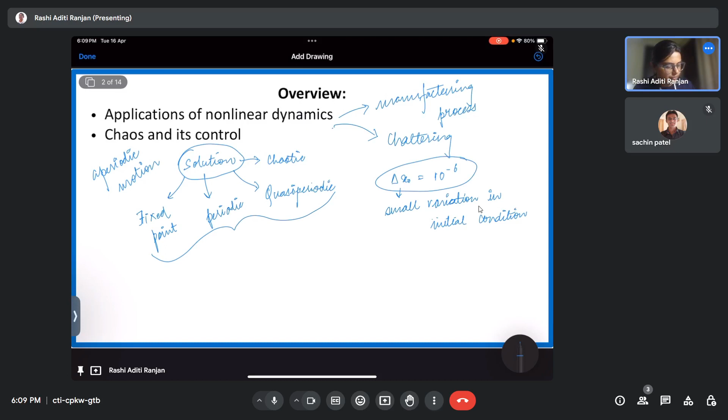Which means that if I am physically using my system, what will I do? I design it on the basis of how it is going to behave. So, suppose I design it for a particular kind of chaotic behavior; let us give it a name, A. My system has some strange attractor A, or A kind of behavior, for the initial condition x naught, x naught dot. This is my solution, which is chaotic.

Okay. Now you see that we as humans, how much variation can we have? Like if I have to give the initial condition myself, it may happen that instead of giving it as 2 mm, I give it as 2 plus 10 to the power minus 6 mm. That is possible, right? This amount of error can anyway be introduced in the system by human error, by machine error, by any kind of error.

Okay, this is possible. But if this much variation is introduced in my system, my chaotic behavior is going to change to some B, which is also chaotic, but it is different from A. It is for the initial condition x naught plus delta x naught. I've kept the velocity the same, just some minor variation in the position. It led to some other chaotic orbit, right?

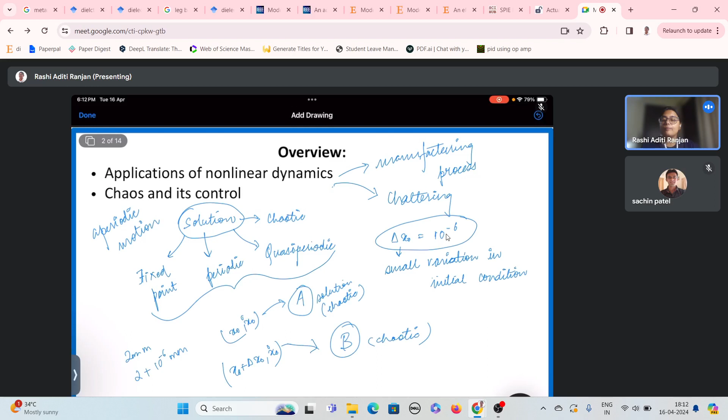Now, see, when we model a system, what do we do? We consider whatever the mechanical relations are, or the chemical reactions, electrical, magnetic, whatever. We form a differential equation that defines my system dynamics. Correct? So when I define my system equation, is it possible that I consider everything? Obviously I can, but it becomes very difficult, right? We usually have some assumptions. Since we have these assumptions, it is not going to give me the proper and realistic behavior of the system, correct? So then what will I do?

The only option I have to deal with a nonlinear system is that I find its equation of motion, I do the analysis, and I get to know how the system is going to behave with what parameter, and then I can just work with the parameter which will give me the required solution. But that is not always possible. Also, there could be some noise or uncertainty in the system, due to environmental conditions or some error. So in that case, what we do is control the chaos. We try to control it.

Now, by controlling, I mean that I know how my system should be. For example, as discussed with you, the pneumatic artificial muscle. If I want my artificial muscle to contract from 4 mm to 2 mm, I know how my system should be. So I'll give it the reference signal, and now the work is of the control system. The control system is going to vary the air pressure in such a way that my desired output is reached. I hope that this is clear. However, I'll discuss chaos and chaos control when I discuss the questions also.

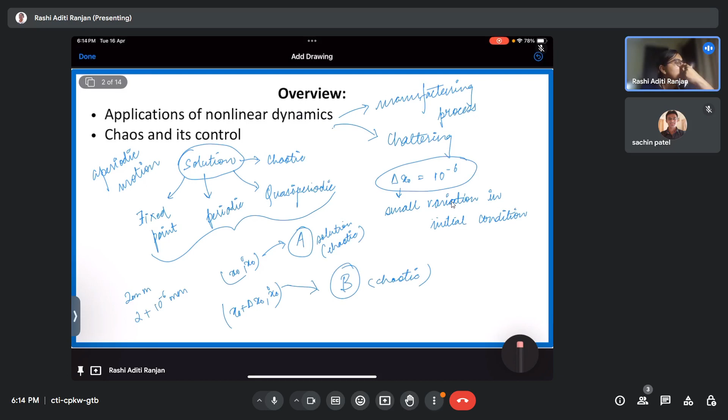Okay, so let us come to the questions. See, this week's assignment is also very easy, and I'll be taking up only some questions which would make your idea clear, and then I expect that you will be able to solve it. Now see, which of the following is related to the chaos control of a system? So firstly, what does chaos control mean?

Now you could ask me why I would write reducing the sensitivity of the system. This basically means it is the objective of your chaos control, reducing the sensitivity of the system. When I say chaos control, it does not always mean that I want to avoid chaos, right? Because avoiding chaos means that I would have to give a lot of work to my system, and only then can it avoid chaos, right?

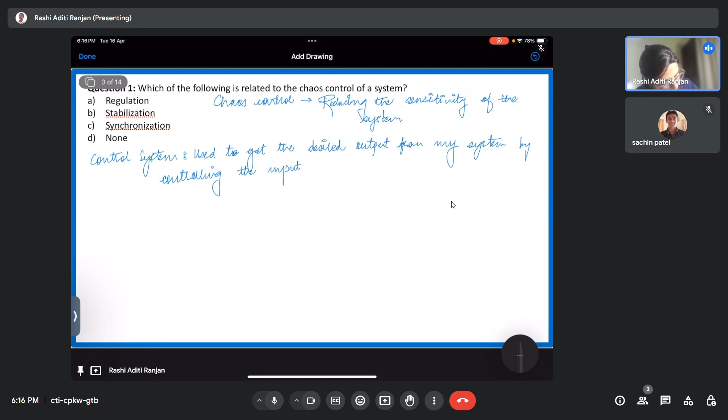We give it an input, it gives an output. Right. So my control system is now going to control my input. Now I am not controlling the input to the system; my control system is going to control it. But I'll have to design my control system so that it will be able to achieve whatever I want, right? So now control system is further divided into two categories. One is open loop control and the second one is closed loop control.

By open loop control, we mean that we give it a particular signal and it is going to perform whatever it performs for the input. For example, we have fans, right? We give it some input and then it is going to rotate. Like for example, I take a table fan, keep it in my room and just switch it on. So it is going to give me some wind or air.

And now if I take that fan and keep it somewhere on a day where wind is blowing at a very high speed, at that time if I switch on the fan, it is not going to give me the same speed as when I use it in the room. Correct. However, my input is still the same, right? But depending upon the external condition, the performance of my fan is going to change. Okay. So this is a case. And the second one is closed loop control.

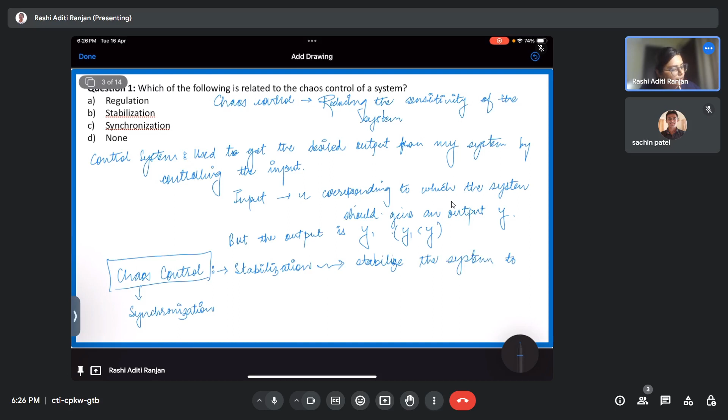Okay, first is your stabilization. Now stabilization has further two types. First one is your regulation, and second one is your tracking. Now by stabilization we know that this kind of chaos control is going to stabilize the system to a fixed point or a reference signal.

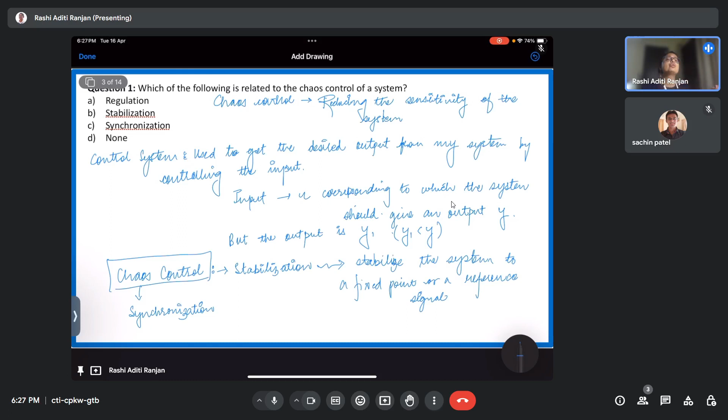Okay, whatever the behavior of the system, my stabilizing chaos control is going to stabilize my system to either a fixed point or a periodic reference signal or maybe quasi-periodic or whatever reference signal I would like to define. The thing is that it is going to keep the system on that particular trajectory. Okay, now my stabilization has further two types.

Okay, your first one is regulation. Now, in case of regulation, what do we do? We regulate the motion of the system. Okay, we regulate the motion. We try that my system does not go into chaos. It is never going to go into chaos. My system is going to stabilize at a particular fixed point, and the fixed point could be stable or unstable, both.

Remember, when we were talking about the system's behavior, we talked about the equilibrium points, that my system could even have multiple equilibrium points because it's a non-linear system. My linear system is going to have only one equilibrium point, but my non-linear system could have multiple equilibrium points. Now, for example, if my system has two stable and one unstable equilibrium point, then for some parameter value, it may happen that my system is going to go into chaos, right?

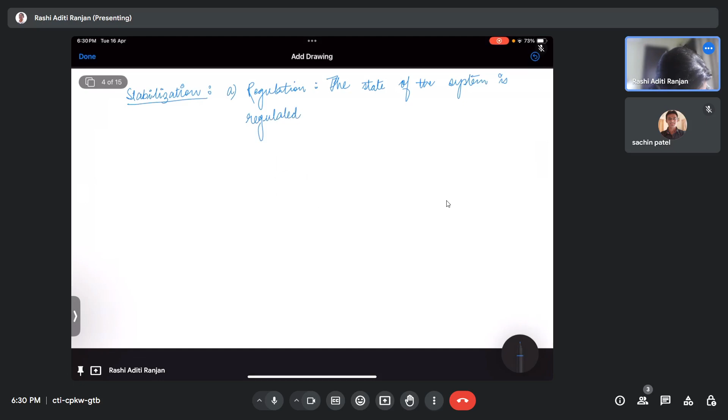So in regulation, the state of the system is regulated in such a way that it stabilizes at a certain point. Now it depends on me whether I want to stabilize it to a stable fixed point, unstable fixed point, or any arbitrary point. That is totally on me. Now this was your regulation.

Now the second type of stabilization is tracking. In case of regulation, I wanted my system to be always at a fixed point. By fixed point, I don't mean an equilibrium point, I mean a certain point. Now, what happens in the case of tracking? Let us suppose that now I want my artificial muscle to keep oscillating with a certain frequency and a certain amplitude. And again, I have applied a force on it, and let us suppose that it is random in nature.

If it is random in nature, it may happen that my system is going to encounter chaos. In the previous case also, my system could encounter chaos, but I wanted it to behave in a periodic manner. So in tracking, I would give a reference signal to my controller. I would predefine the reference signal, which could be sinusoidal, square wave, or any kind of wave that I want, not necessarily periodic. It could be aperiodic or whatever behavior I want, depending upon the application.

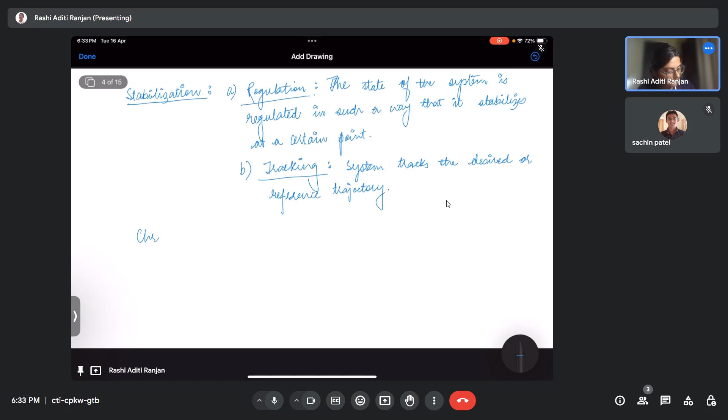Apart from that, there is another thing that comes into chaos control, which is your synchronization. Now, what do I mean by synchronization?

See, synchronization simply means, as I have explained earlier, that when my system is in the chaos area, a very small variation in the initial condition would take my system to a different trajectory, right? A different kind of behavior after a certain time. So in that case, I want to reduce this sensitivity towards initial condition of my chaotic behavior. I want a controller by which, even if there is small variation in my initial condition, my chaotic behavior is going to be the same. My attractor is going to be the same, right? I want that kind of behavior.

For example, in case of stabilization, I was using a controller for the regulation or tracking of the system, right? But in case of regulation or tracking, my system would require a constant input from the controller. The controller would work continuously and it would take high computation every time, right? But what if I want my system to behave how it is behaving, but I just don't want my system to have sensitiveness towards chaos? I want chaos. I want my system to have chaos. I just don't want it to show this much sensitivity.

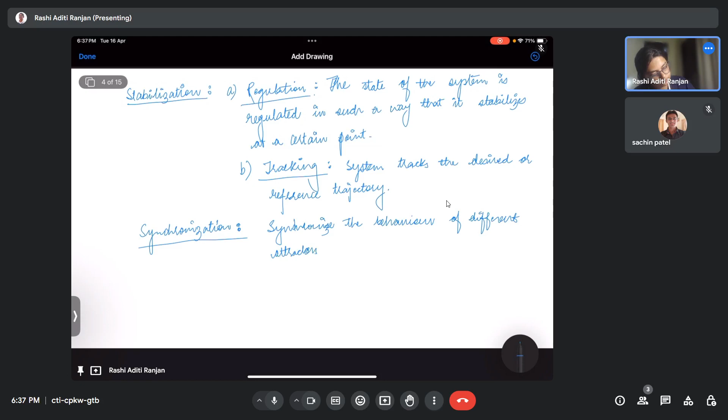So this is what we do in case of synchronization. In this case, we try to make similar behavior, or should I say synchronize the behavior of different attractors. Okay. So now if I come back to the question, which of the following is related to the chaos control of a system? All the first three options are correct. Okay.

Coming on to the second question. Which of the following is correct regarding chattering? Now, the first question is, what is chattering? If you remember, as it was explained, chattering is basically undesired vibrations that can be seen in a system. Right? It is usually seen in manufacturing processes, like in case of cold rolling of sheets, chattering could be seen. So these are the unwanted vibrations. Okay, so first I'll write: chattering, these are the undesirable vibrations.

Now, if I talk about the rolling process: if I give it a sheet like this and apply two rollers like this, it would compress the sheet and reduce its thickness. Right? These are my rollers. So this is your rolling operation. Now, rolling is further divided into two categories, hot rolling and cold rolling. In hot rolling, the workpiece is heated above the recrystallization temperature, and in cold rolling, the operation is performed below the recrystallization temperature, or you can say at room temperature. So chattering is observed in these kinds of rolling.

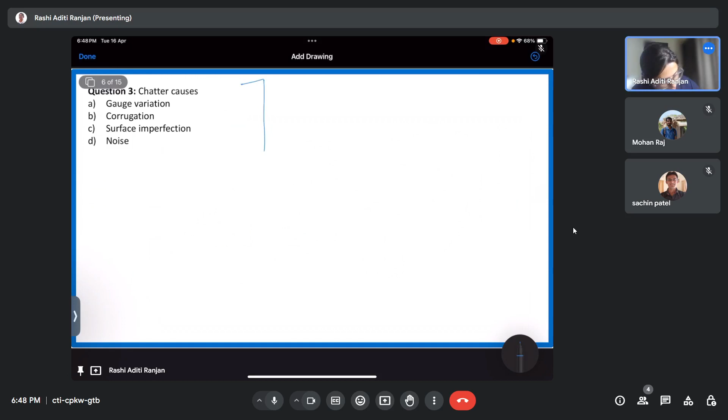Okay, so as I told you, if this is my workpiece and this is the trajectory of the tool, then what is going to happen? My workpiece is going to be like this. So this is the actual. However, all these are exaggerated views. This is the actual, and this was desired. So what happened? Firstly, I wanted the surface to be a straight line. What has it become? It has become wavy.

Second, I wanted, let us say, a thickness small h, but now I'm having a thickness capital H, which is not equal to small h. So chattering has led to gauge variation. By gauge variation, I mean that whatever final dimension I wanted for my system, because of the chattering, my operation has not been able to perform the task properly, and that is why there is a variation in the dimension of the workpiece. So it causes gauge variation.

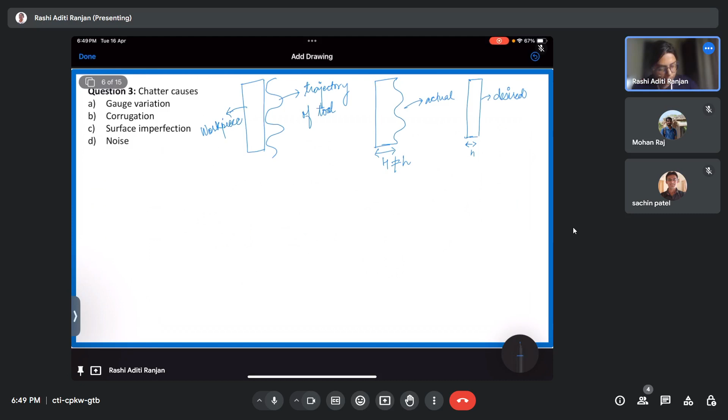Second says that it causes corrugation. Yes, it causes corrugation. Corrugation means a wavy kind of texture that appears on the surface of your workpiece when a manufacturing process is done on it, and it is due to chattering. See here, it has led to the wavy surface, whereas I wanted a straight surface, so definitely it causes corrugation.

And the third, which says that it causes surface imperfection, yes, it causes surface imperfection. Corrugation is also, you can say, a part of surface imperfection, right? Because I wanted my surface to be smooth and straight, and I wanted a particular dimension. However, chattering has caused corrugation and gauge variation, and it also causes surface imperfection.

In this case, I have given an exaggerated view. It may happen that my vibration is very small compared to the dimension, something like this. On a large scale, I could maybe neglect the gauge variation because the variation would be very small. However, it has given surface imperfection; the surface is not perfect. And the fourth one is noise.

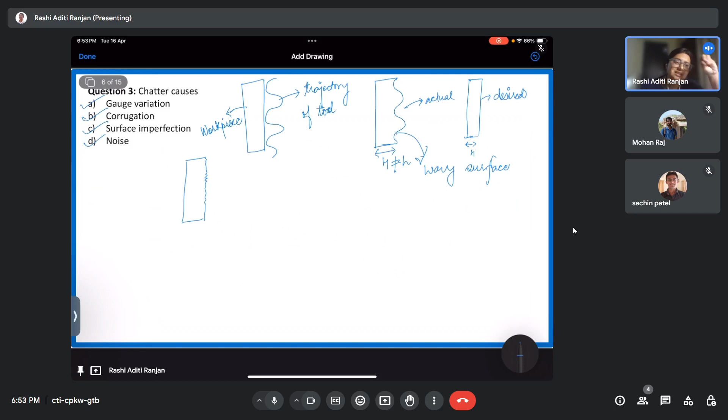In manufacturing processes, there are two, three steps that we perform. The first step is not that precise, but we try to get the dimension near what is required, and then we do finishing processes just to get a precise dimension and a perfect, shiny surface. If we use a tool which has chattering, what is the point of doing that finishing operation? There is no point. So it is very important that chattering is avoided so that the process is efficient and I get the desired result. Coming on to question number 4. This is about the type of chatter.

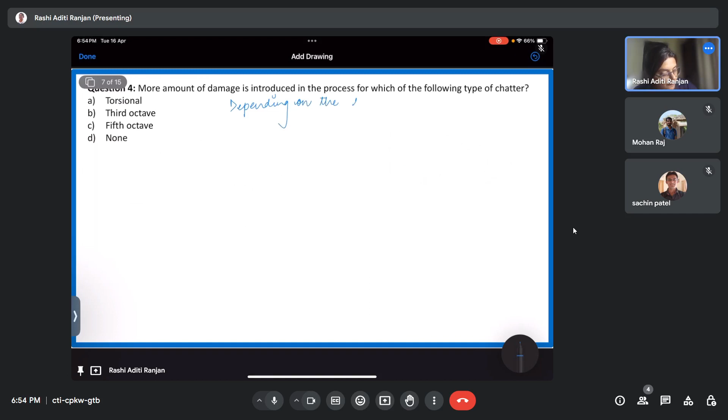So firstly, how many types of chatter are there? So, depending upon the frequency range, chattering is divided into three categories, if you people remember. So, depending on the musical octave of the natural frequency, the types of

chatter are: the first one is your torsional chatter. So if you see, the different types of chatter are divided on the basis of the frequency range, right? So your torsional chatter is the chatter wherein the frequency range is between 5 to 15 hertz. Then is your third octave chatter, and this is when your frequency is between 120 hertz to 240 hertz.

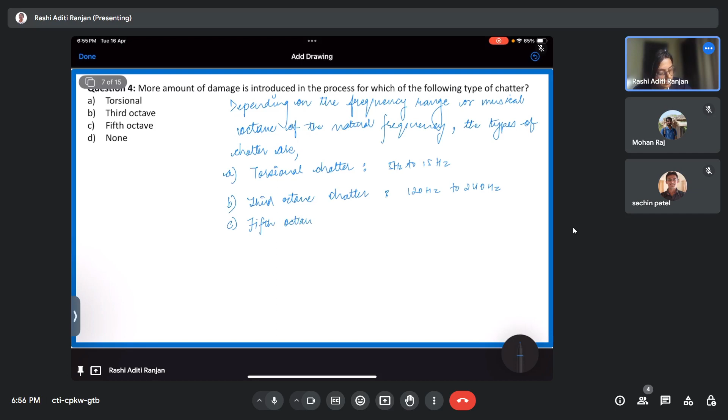And in the third case, you have the fifth octave chatter, wherein you have your frequency range between 550 hertz to 650 hertz. Okay, so depending upon the frequency range, our chatter is divided.

Now, if you look into the frequency ranges, you would get to know which could actually be dangerous or produce more damage. If you remember the basic definition of chatter, there is a vibration between the tool and the workpiece, which could be due to many underlying reasons. However, there is a relative vibration between these two, right? So if my frequency range is between 5 to 15 hertz, what is going to happen?

The frequency is less. However, with the increment of frequency, the noise that is being produced is more. Why? Because making contact and losing the contact will happen at a faster pace with the increment of frequency. Because of this, the surface imperfections would increase. And it is also dangerous. The vibration at such high frequency is dangerous, right?

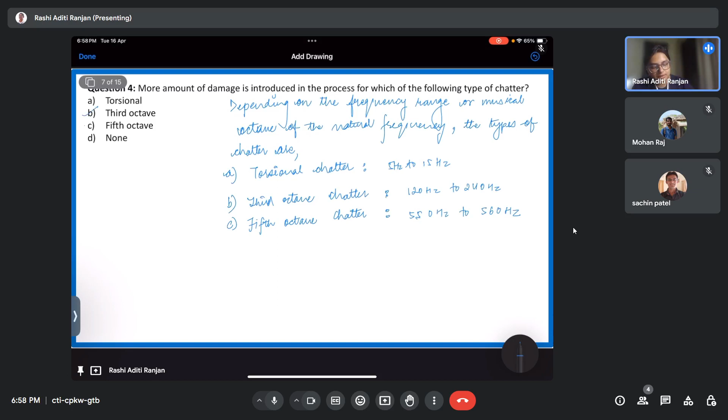Coming on to question number 5. For the pneumatic artificial muscle, which of the following is true? Firstly, what is a pneumatic artificial muscle? Or should I say, what is an artificial muscle? So we'll talk about natural muscle. What happens in a natural muscle? For example, if I have my hand and I want to lift something, what is happening?

This is my hand straight, and if I want to lift something, my hand is like this, right? Let us say that I'm trying to lift some weight. This is some weight, right? I'm lifting it. So, here, if you see what has happened,

you'll realize that I can model it like this: there was this muscle over here, and when I am lifting it, this muscle contracted, right? It contracted, because of which my hand got folded about the elbow, and I was able to lift the weight. So this is how my muscle operates.

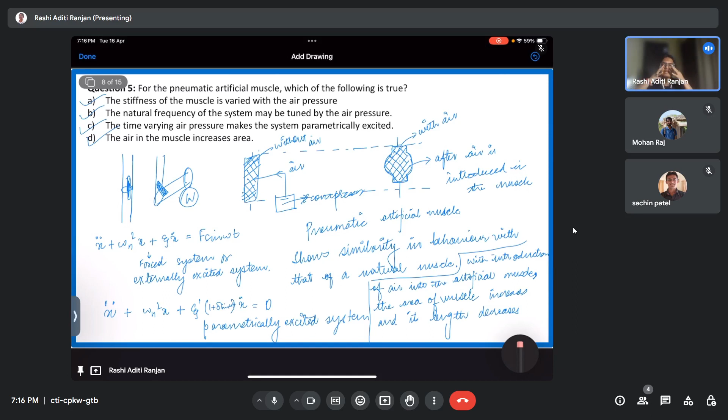For example, if I have a braided muscle, because of the arrangement of the braids, the overall volume of my muscle also changes, right? Because the braids may align in such a way with the air pressure. So that could be a reason as well. And since it's an elastic material, it may contract or expand depending upon the air pressure and its material properties. So I cannot tell that yes, it is following the incompressibility constraint.

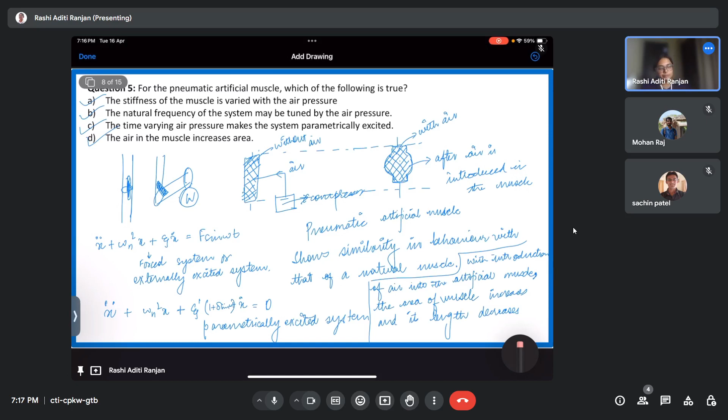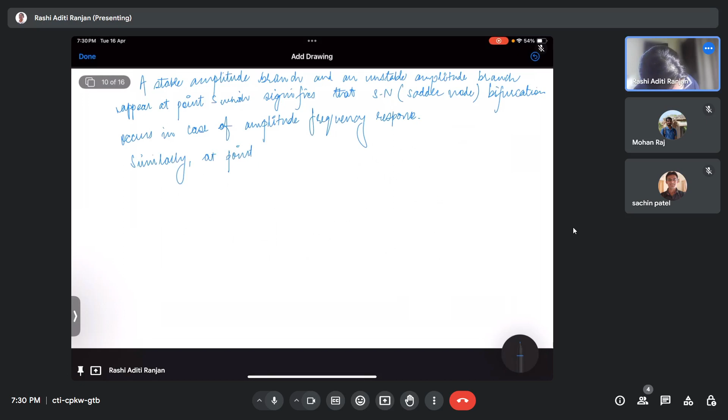And similarly, okay, I have written it wrong, right? At point S, they disappear. Here it should be disappear. And at R, one stable and one unstable branch of the amplitude appear, which is your saddle node bifurcation.

Okay, so this was the second concept. Now we'll come on the third concept, which is your basin of attraction. Firstly, what is a basin of attraction? We define the basin of attraction in such a way that I would know that with the change of initial condition, where would my system go to. So, what do I do in this case? I take a set of initial conditions. In the x-axis, I would plot my initial condition x naught. In the y-axis, I would plot the initial velocity x naught dot.

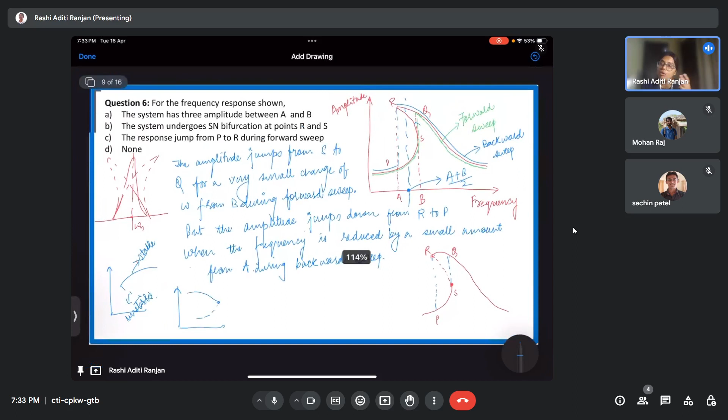Now, if I keep all the parameter values constant and vary the initial condition, how is my system response going to vary? Which means, which amplitude is it going to achieve? I'll call them A1, A2, A3. You have three amplitudes A1, A2, A3. So if I change the initial condition, is my system always going to have the amplitude A1? Or is it going to sometimes have the amplitude A3, or could it have the amplitude A2?

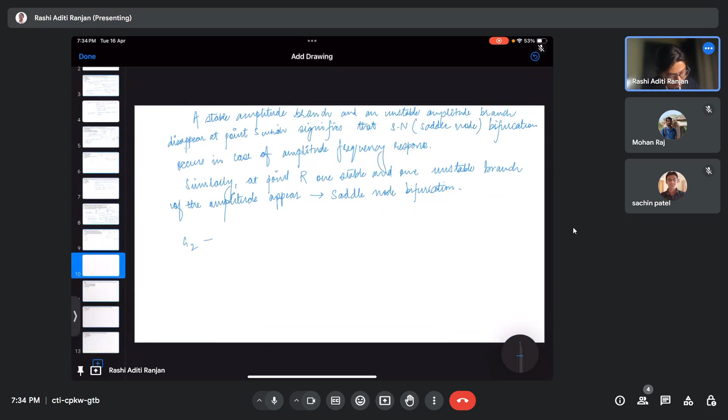So now see, in this case, firstly, A2 is your unstable amplitude. First, I'll just write it. My A2 is unstable amplitude. Now, what is the property of an unstable fixed point? If my system is starting from the unstable fixed point and there is no forcing on the system, my system is always going to remain at that unstable fixed point.

Simple. But even if there is a very small variation in the initial condition from the unstable fixed point, my system is never going to come back to that fixed point. Similar is the case for amplitude also, dynamic case also. If my system is starting from an initial condition which is in the trajectory of the amplitude A2. By this I mean, for example, my response will be A2 sin((A + B)/2 · T), right?

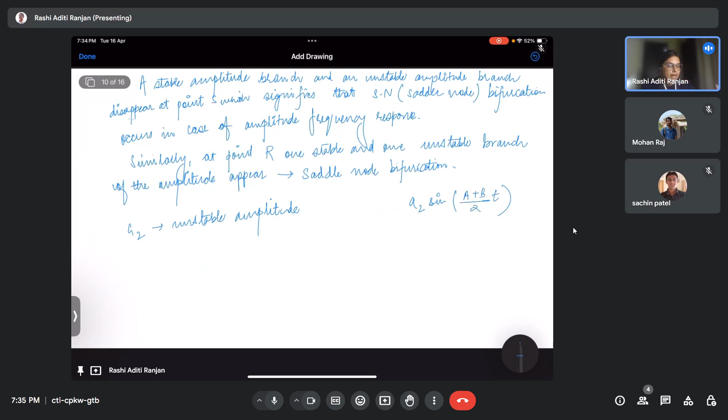So at T0, my X naught will be what? It will be 0. Let us not talk about 0 because T0 is a very trivial case. I'll take as 90. So then my X naught is going to be what? A2. So if my initial condition lies on the circle, not inside or outside, with the radius A2, then my system is going to achieve that equilibrium, like this.

But if it does not, then it is never going to achieve that. It is not possible also. This I just gave you an example, but in practical systems, since this is a forcing case, my system is going to diverge from that place. This would be possible if my system is without forcing and without damping. But if my system is forced, it is going to diverge from that point. So A2 is never going to be achieved. Okay, it will not achieve A2.

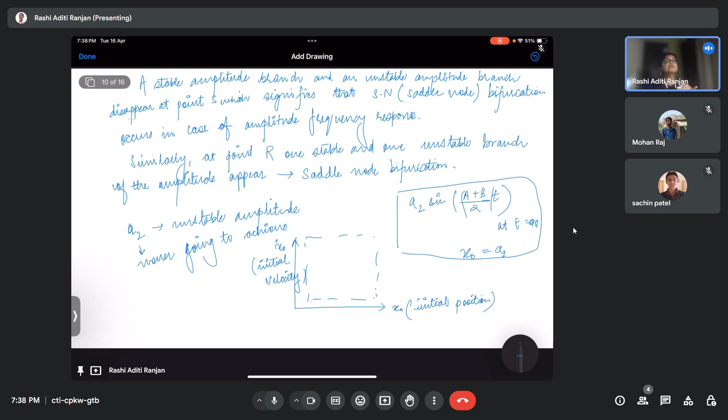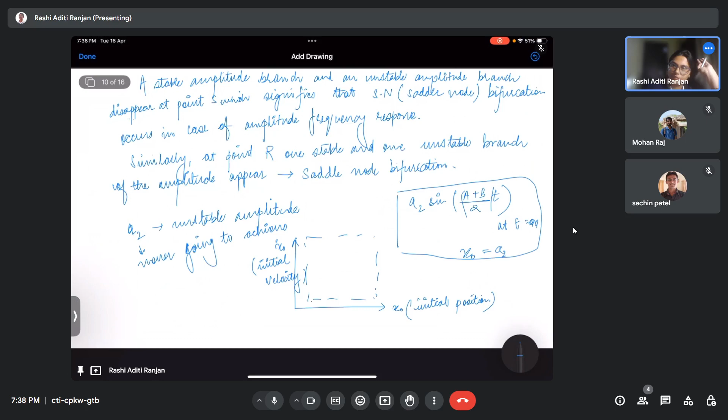In this case, as I related it with the amplitude frequency response, it was easy for me to identify that A2 was my unstable amplitude, so it is never going to be achieved. However, if I don't know the amplitude frequency response at an earlier stage, then I'll have to plot the basin of attraction. Okay, I hope that this is clear.

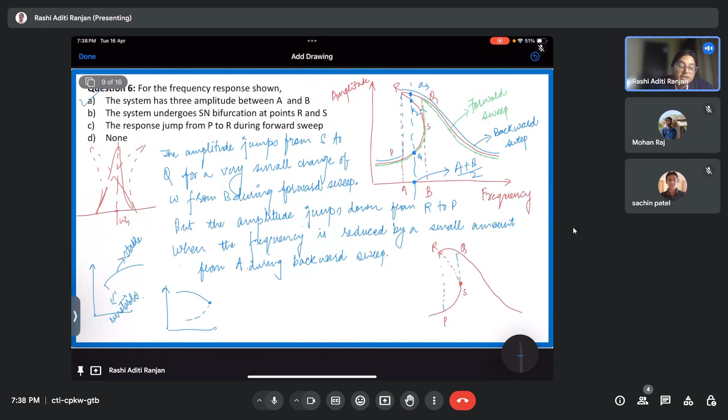So coming on to the options. The system has three amplitudes between A and B. Yes, it is correct. However, among the three amplitudes, one is unstable and two are stable. Three amplitudes, we'll write one unstable plus two stable. The system undergoes SN bifurcation at points R and S.

As I have shown you, yes, the system undergoes the saddle node bifurcation at R and S. However, the direction is different. In one case, the stable and unstable are coming together and vanishing, and in the other case, there is the occurrence of two branches, one stable and the other one unstable.

The response jumps from P to R during forward sweep. Is it? No, because during forward sweep, my system is going to jump from S to Q. It is very important that you remember that during the sweeping of the frequency, the system is always going to follow the trajectory up till the point where there is some jump criteria.

It is not going to jump from here. It is always going to jump from this discontinuity, sort of discontinuity, I would say. Here you can see that there is a change of slope. There is a change in the sign of the slope, and at that point only, it is going to show this kind of a jump. So this is not correct. So only A and B are correct options. Okay.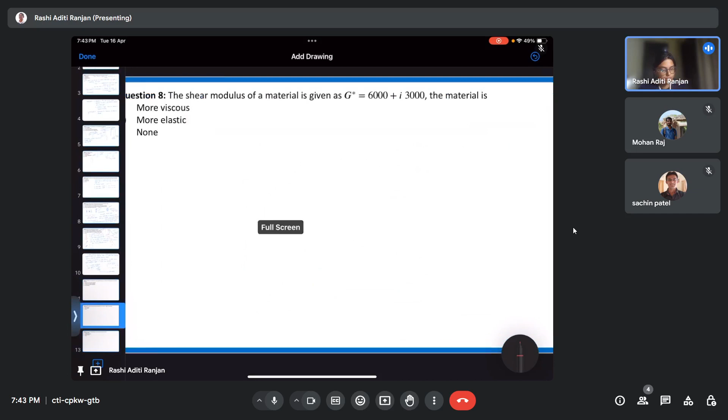Okay, so the question says that the shear modulus of a material is given as this. When my material is viscoelastic, the shear modulus is defined in a complex form so that one could relate the elastic property and the viscous property of the material, because if my material is viscoelastic, it is going to have some elastic behavior along with some viscous behavior, but which one is dominant? It may happen that the viscous effect is very less, so we could neglect it and just consider a linear damping. But if the viscous effect is very high, we cannot neglect it. We need to consider the viscous effect.

Now, if my material has a viscous effect, you realize what is going to happen. It is going to damp out the vibrations, and that is why the material is going to reach the equilibrium state. We model a viscoelastic material using a spring mass dashpot system because it has both the properties of an elastic material and a viscous material. And like I said, if my material is not that viscous, it is more elastic, so I can consider my damping coefficient to be very less, or just neglect the damping and consider the mass and the spring.

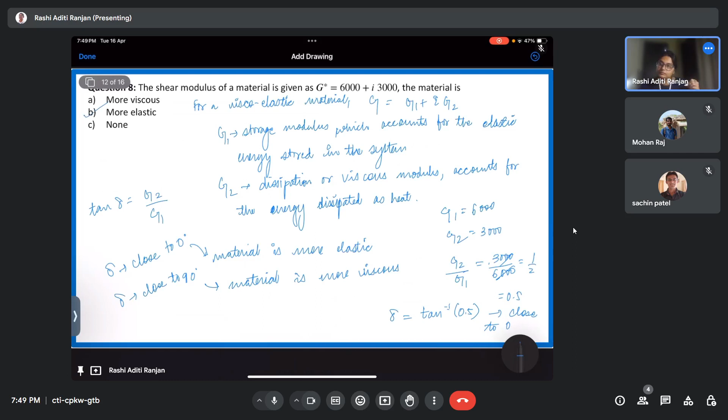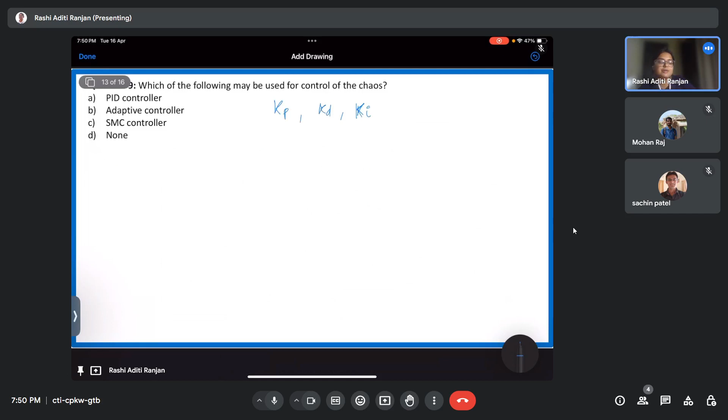Now by adaptive, I mean that in case of a PID controller, I have gains like KP, KD, and then I have KI. In case of PID controller, these are fixed, while in case of adaptive, KP, KD, and KI vary with the system response or with the time. So it varies with time. It is not constant throughout. So because of which, if my error reduces, these values also reduce. So it would lead to a decrease in the energy that is required for the controlling of the system.

C option, we have a SMC controller. SMC is a sliding mode controller. It's a nonlinear controller. It is also very effective and can also be used for controlling of the chaos. So all the three answers are correct. And these are all related to control systems, so discussing it is not much important.

However, I want to mention that in this live session, I have taken mostly theoretical questions. Reason being that in your assignment problems, if there is any computation or numerical related problem, you can get the answer by referring to the lecture or by applying the code. If I had used the given equation directly to solve it through MATLAB, that would not be right, since that assignment problem is yours and you have to solve it on your own.

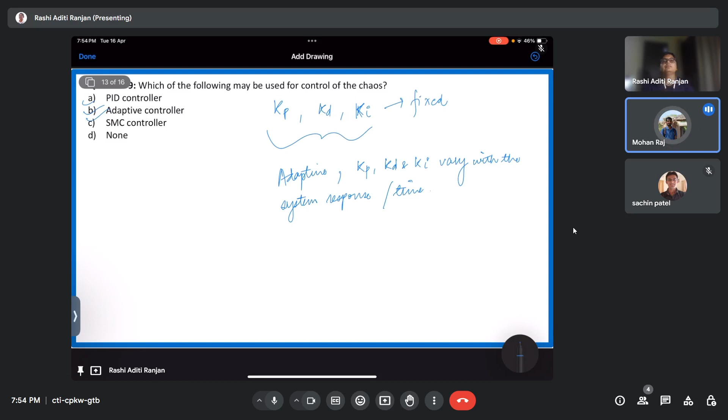Madam, one doubt is there. Yes, please. With respect to the bifurcation diagrams, usually on the x-axis we will be having control parameters, and on the y-axis we will be having some response, right? But in the case where you explained the Duffing frequency response plot... You're talking about question number 6? Yes, ma'am.

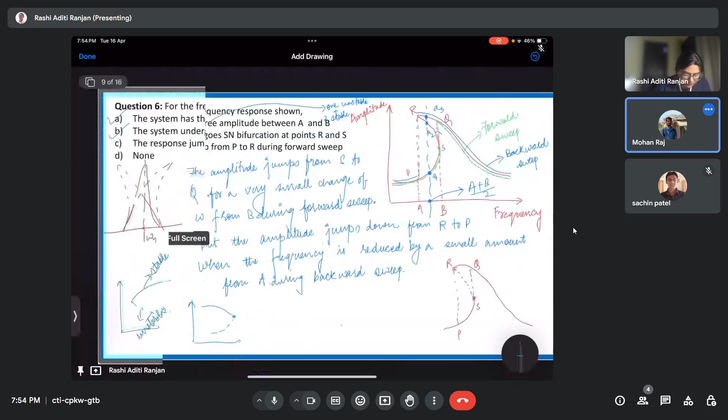I'm getting confused because in most of the bifurcation diagrams, the x-axis will be having control parameters and the y-axis will be having not the response. It will be something like amplitude, right? Is it input amplitude or output amplitude? Output. Output, not input.

Okay, madam. With respect to the stability chart, for example a parametrically excited system, on the x-axis we will be having frequency, and on the y-axis we will be having input amplitude. No, we have output amplitude. Input amplitude, if we vary the C in the bifurcation diagram, I think there is some... You're getting confused somewhere. I'll just try to explain once. Then, if you have the same doubt, you can ask me.

So, in case of a bifurcation diagram, we change the parameter and then we check what is the variation in the system response. If we plot the input amplitude on the y-axis, then how are we actually checking the system response? We are not concerned about the input. Through a bifurcation diagram, we want to know, with the variation of a certain coefficient, how is my output changing? How is my system response changing?